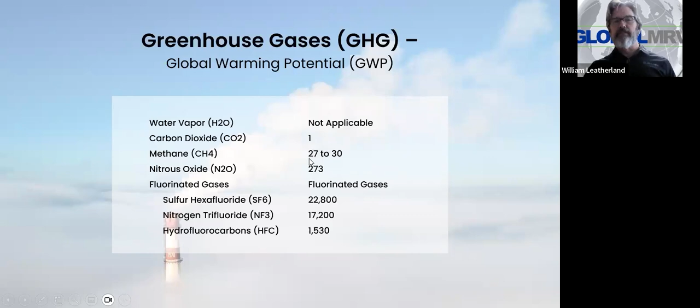This gives the balance, and actually it's hard to see nitrous oxide. It's so small, it looks like, okay, why do we pay attention to it? For all the greenhouse gases, here are the sulfur hexafluoride, nitrogen trifluoride. These have an even higher global warming potential. Let's take a look at those really quick, and also the greenhouse gas percentages in the actual atmosphere. You see 4% for water vapor, carbon dioxide, methane. It shows nitrous oxide as such a small percentage. So why do we find it important?

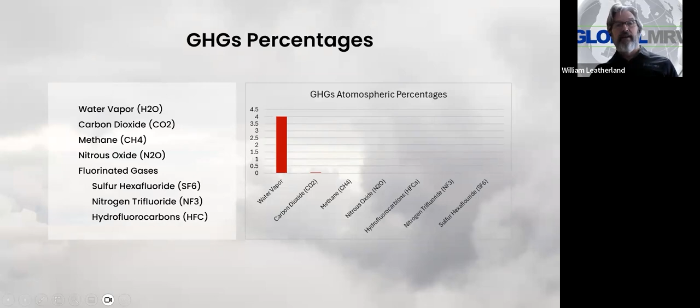A water molecule exists in the atmosphere for maybe 2 weeks, falls back into the whole condensation, evaporation cycle. Carbon dioxide stays in the air not quite as long as nitrous oxide, but there's much more of it. So that's why it has a much greater influence, which is why we base everything off of it. It's the standard, if you will.

Just want to make sure that everything's still working. I'm looking back at the loud and clear. Excellent. Glad to hear it. Loud and clear. Perfect. All right. So I'll go back to it.

You'll see that the carbon dioxide, there's more of it in the atmosphere, but it doesn't last as long. Whereas nitrous oxide, there's less of it in the atmosphere, but it lasts much longer, and it's got a higher global warming potential. You see everything compared with methane, hydrofluorocarbons, nitrogen trifluoride, all the different ones that we have. Like I said, I'm just going to go through this really quick. You could see this whole thing on last month's webinar if you'd like to take a look at it.

So we were talking specifically about global warming potential and how nitrous oxide affects global warming, how nitrous oxide is part of vehicles, automotive. But one thing I'd like to take a look at really quick. I actually enjoy this. I don't know if you guys have ever seen Top Gear or not, but nitrous oxide, N2O, is actually utilized in so many different ways. It actually can be a useful gas.

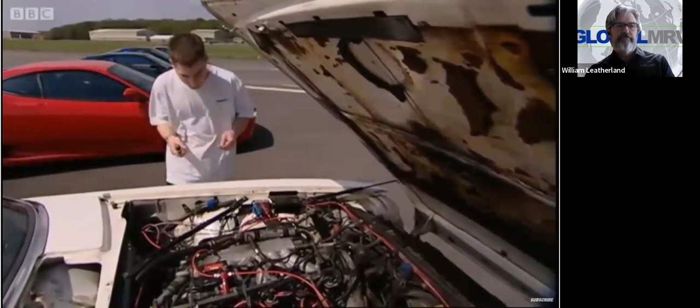Jaguar XJS was battered by the might of the world supercars in a straight line fight on our test track. But we're not going to leave it at that and give up. We're going to go back for another go. But this time, the Jag has got a little trick up its trousers. Oh, why that? So the Top Gear Warhorse is going to take on the best the world has to offer. How, you might ask, are we going to do that? Well, we're going to cheat, obviously. And we're going to do it with the help of the wizards of NOS. NOS is nitrous oxide system. That's this stuff. And the guys who fitted it are the wizards.

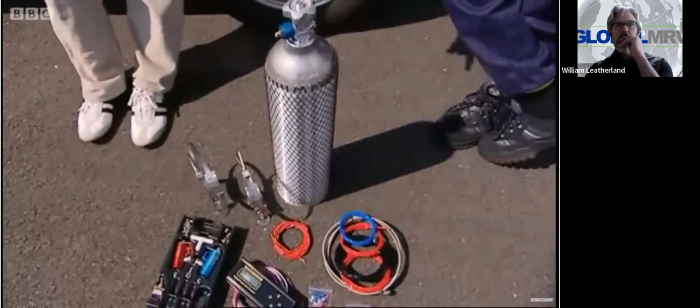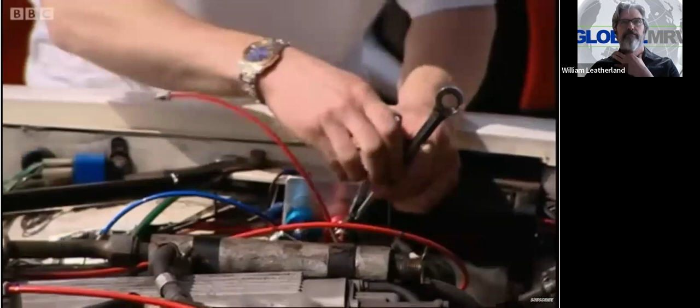Trevor, you put all this in our car. How much difference is this going to make? Well, the system's got the ability to deliver up to 500 horsepower extra. 500 horsepower over and above. Just very, very simply, how does it work? We feed oxygen in the form of nitrous oxide into the engine. We'll mix that with an extra supply of fuel. The combination of the two burns in the engine and produces more power. What if you get it in the wrong percentage? If we put too much fuel in, it'll just belch out black smoke out the exhaust and it'll reduce power. If we put too much nitrous in, it could melt something. What, like the engine? Like the engine, yeah. So you're probably going to break our car.

And there they are. £500,000 worth of supercars nearly against 250 quid worth of rusty Jag, albeit with a few hundred quid worth of nitrous added on. I just hope it makes it to the start line. So for this run, the nitrous will give our old Jag an extra 200 horsepower, making a total of 500. But will that be enough? And will it hold together? Oh yes, and straight away you can see the difference. It's blowing away the Venturi, the Corvette, the Honda, and even the Ferrari 360. But the big question is, can it hold off that mighty Porsche 911 Turbo?

Well, right for the old Warhorse, yeah, it just goes to show 250 quid worth of Jag, about 500 quid worth of nitrous, and it'll do a standing quarter in 13 seconds. And that's faster, as we've just shown, than a Porsche 911 Turbo and a Ferrari 360.

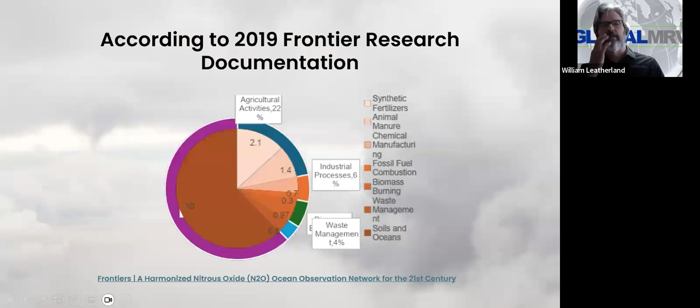And here, this is a group called Frontiers, and they produce scientific journals and scientific papers. They're about the third largest supplier of scientific papers in the world. So they give a much different number here. But once again, you can see the small part that we're looking at, fossil fuel combustion, is about 0.3 of this whole pie. It's not quite a percentage. It's a little bit different here, but it's still a very small percentage, as you can see.

So when we're looking through all this, the main contributors, I wanted to make sure that we break them down quickly. I'm going to go through them kind of fast so that it'll be easy for you to understand, even if you're not a chemistry person, like I'm not a chemistry person, because you'll see the information kind of repeats itself for agricultural, biomass, natural resources, and even waste management. So one of the main contributors, agriculture, and we're looking at the synthetic fertilizers.

The use of nitrogen-based fertilizers in agriculture is one of the largest sources of N2O emissions. I say one of the largest because I initially read through the EPA documentation, then saw the Frontiers documentation, so it's one of the larger sources depending on which documents you're looking at.

This all comes down to microbial processes happening in the actual fertilizer. Nitrogen, as we may remember from chemistry class, is one of the most abundant elements and is needed for plants to survive. So synthetic fertilizers are applied to the soil to increase the nitrogen content.

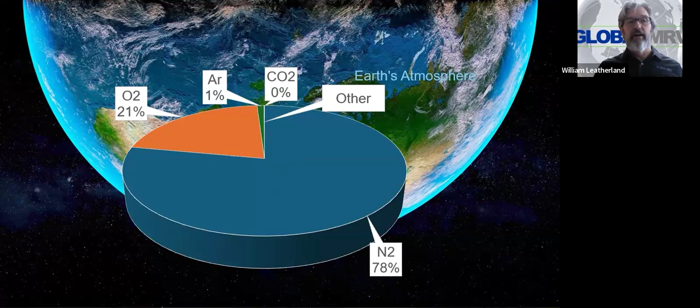Here you can see nitrogen - this is the balance of the Earth's atmosphere: 78% nitrogen, 21% oxygen. This is what we think about the most, what we're breathing, but we're breathing nitrogen as well, it's coming through us. Carbon dioxide, argon, you see the other breakdowns of it. Nitrogen is a huge part of our lives, a huge part of what we have.

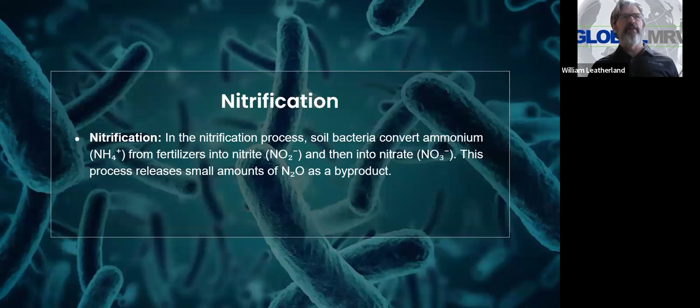When we go through these synthetic fertilizers and look at nitrification and denitrification, there's a whole chemical process for how that's done. Ammonium from fertilizers is converted to nitrite, NO2, and nitrate, NO3, and during that process we release N2O. Denitrification is a little bit different.

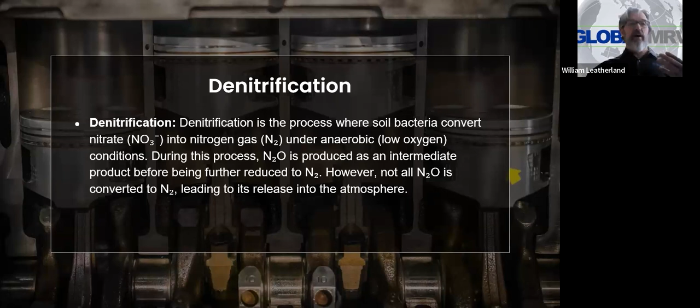Denitrification is the process where soil bacteria convert nitrate, NO3, into nitrogen gas under anaerobic - low oxygen - conditions. During that process, N2O is produced as an intermediate product. It's not something they're actually trying to make, it's just off-gassing, adding to the atmosphere. That's in the chemical processing of making fertilizer.

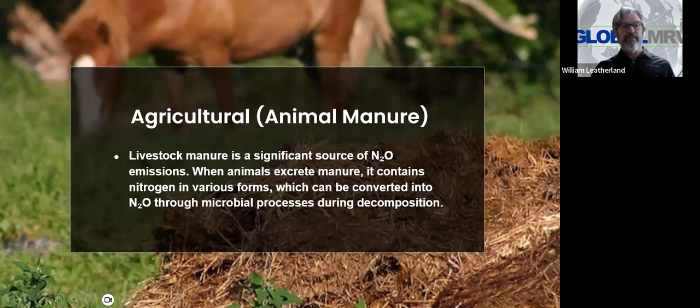As we move to agriculture, animal manure is another significant source of N2O production, actually producing it itself. Once again it has a lot to do with nitrification and denitrification, the microbial processes. When we break down livestock, 70% of that comes from manure from cattle. Kind of disgusting that we're talking about this. Why aren't we talking about cars?

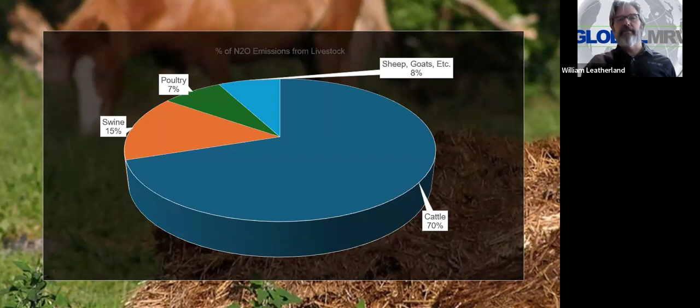We're going to get to it. Why aren't we talking about vehicles and the combustion industry? We're going to get to it. But I thought this was interesting.

There are different manure management practices that can be taken to reduce this: anaerobic digestion, frequent manure removal - there are so many different ways.

A lot of this is being impacted by large industrial farming and industrial cattle raising compared to the past, when people had their cattle out in pastures. Now when they contain them in buildings, it promotes microbial activity and promotes a low-oxygen environment since everything's inside the building, covered, not a lot of sun. So you have more of it being produced now than in the past.

Once again, you won't see that in your regular, smaller farmers - it's more the industrial complex type of farmers. And it can make a difference: soil conditions, temperature, and moisture levels. This is another thing you'll see repeat itself over and over.

Even when we go to biomass burning - here's another section - you have the combustion of organic matter. I was curious about this because it's prevalent and we saw it recently with the LA fires. What happened with the LA fires and how did that affect us?

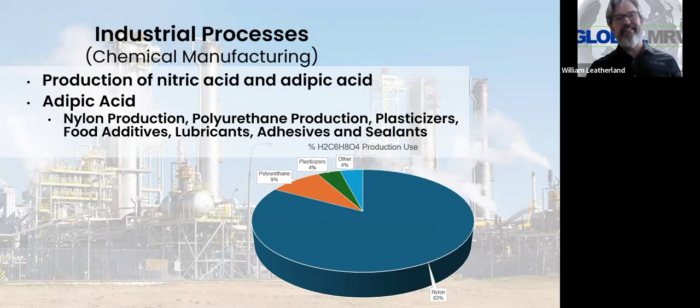Now, also we have adipic acid. This is interesting to look at. It's in nylon production, polyurethane production, plasticizers, and that's right, adipic acid in your food additives. I'm not sure if that's the creation of food additives or actually what's put into our food, but it's still something to know that the same thing they're making nylon or lubricants with, they're also making your food additives with.

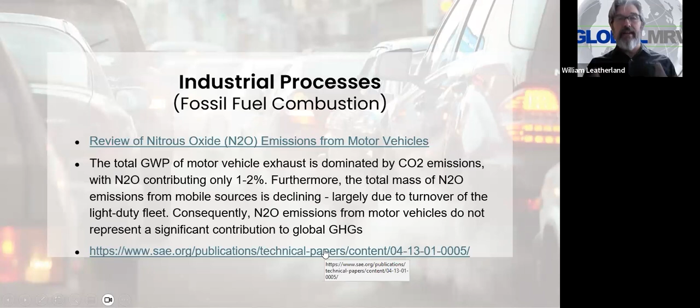Furthermore, the total mass of N2O emissions from mobile sources is declining. We're improving as we develop different catalysts and catalytic converters, get more efficient with our engines, and turn over that light duty fleet—old vehicles are turning into new vehicles. So N2O emissions from motor vehicles don't represent a significant contribution to global GHGs. I get that from our reference paper, SAE, and you'd think they'd want to favor saying it doesn't contribute, but I think even with the 1 or 2%, that's actually a high estimate.

So there are different ways N2O is produced. One is high temperature combustion. There's thermal decomposition of nitrogen compounds—at high temperatures, the nitrogen containing compounds in the fuel can decompose and react with oxygen to form N2O. Or it could be incomplete combustion, something racers and truckers talk about often. If they're having incomplete combustion, they see not only their fuel efficiency go down, but it also creates a higher opportunity for N2O to be created.

Fuel composition makes a huge difference—it's a matter of how things are composed and heated, and the oxidation of nitrogen in the air. The nitrogen present in combustion can react with oxygen at higher temperatures. We're talking about how temperatures have to be put into a specific box of what can be utilized, and we'll talk about that in just a second.

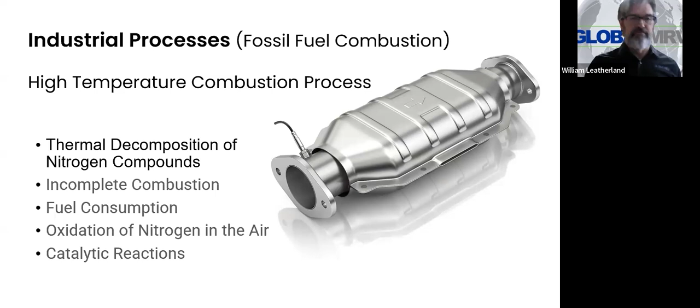And then catalytic reactions—with some combustion systems, catalysts are used to reduce emissions, and catalytic converters are constantly used to reduce emissions. We'll talk about how the oxygen sensor makes a difference in that. So NOx reduction by catalytic converters—N2O can be produced through ammonia slip, which is probably one of the main things we need to measure these days, because N2O is very difficult to measure in real driving emissions. So we measure ammonia instead, because that's what reacts with oxygen to create N2O.

The catalyst composition and temperature makes a difference—again, we're talking about composition, incomplete reduction reactions, secondary reactions. Now, as we continue, let's talk about catalytic converters and why they were made. These things were created back in the 1950s and continue to be improved today, but they weren't even required in vehicles until the 1970s, and not in Europe until the Euro 1 emission standards on January 1st, 1993.

But they make a huge difference, because when you use those catalysts, you take things like nitrogen oxides, carbon monoxide, and hydrocarbons, and transform the NOx into nitrogen, the most abundant thing, and the carbon monoxide into carbon dioxide. It seems counterintuitive, but we'd much rather have carbon dioxide in the atmosphere than carbon monoxide. It also takes hydrocarbons, separates the carbon out to go into carbon dioxide, and ultimately produces water with the leftover hydrogen.

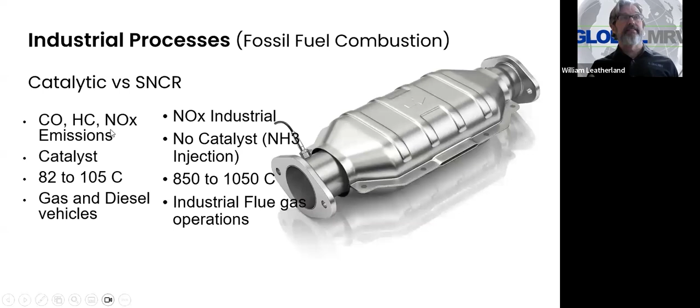A huge difference is the temperature of your emissions as you're coming out of a vehicle, 82 to 105 degrees Celsius if you've got a gasoline engine or possibly a diesel engine, as opposed to flue gases, 850 to 1050 degrees Celsius, as I'd already talked about. These are gas and diesel engines, and this is mostly industrial flue gas operations. So this is the catalyst over here, and this is SNCR.

The next way that we try to reduce emissions, but it can produce N2O, is through selective catalytic reduction, SCRs. Most of that is talked about in industrial processes, and that's where it's usually used, but it's also used on large diesel engines and on many 18-wheelers.

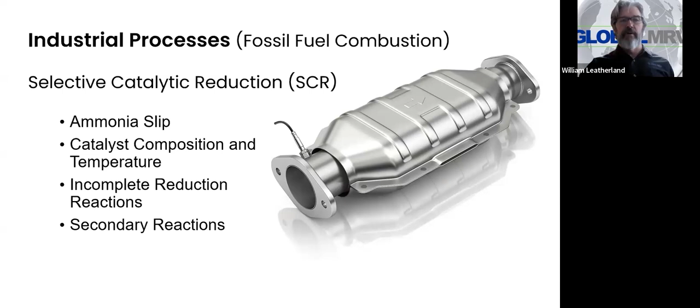This is where you reduce nitrogen oxide emissions by injecting urea. Then it goes through a catalyst where the reaction is more potent, and it facilitates the chemical reaction to convert NOx into nitrogen and water. Once again, that's what we're trying to do: take that NOx and convert it into nitrogen and water. And you might be familiar with this with DEF, diesel exhaust fluid.

So what are the differences between all of them, just real quickly? We already compared these two. With SCRs, for NOx in industrial and diesel, it's got a catalyst and a reductant, it's varied in its temperature, and it can be used in industrial and diesel engines. These both go after NOx, whereas usually the catalytic converter is trying to eliminate CO, hydrocarbons, and NOx.

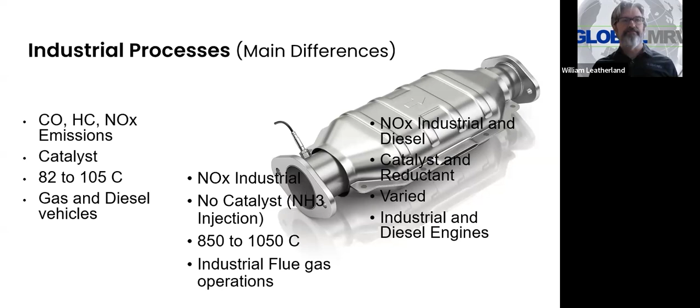This gives you an overall visualization. I wrote here that it's an internal combustion engine vehicle, but this is all internal combustion engine and flue gas being produced. I think most of the time people think of those just being in automobiles. But this is everything that's produced in typical emissions, which is why you see 83% of it is CO2, which is what makes it so important.

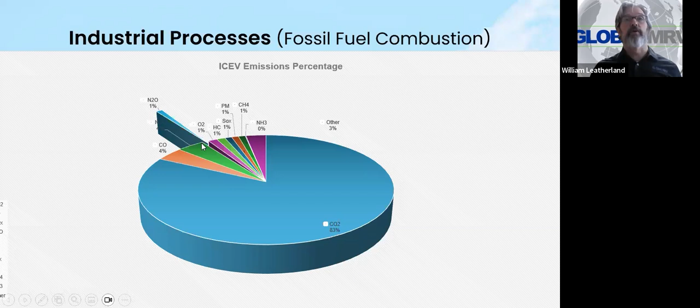Now, when it comes to N2O, I'll go to the next slide so you can see. N2O is just a small sliver. Everything I'm reading, it's a little less than 1%. This is what we're trying to eliminate and bring down in vehicles. And it can be hard to measure. It's a very difficult thing to measure in this smaller capacity, when you've only got 1%.

And to get it in a true mobile sense, it's more difficult to do. That's why we talk about measuring NH3, because that's one of the main things that reacts. And you'll see that most in diesel engines, not so much in gasoline engines. But as temperatures change, as they make changes to engines, you'll see that more and more.

And in fact, it was just yesterday I was looking at how Toyota has created an internal combustion engine that burns solely ammonia. Of course, there's a whole lot of challenges in that, but it's interesting that we're continuing to use the internal combustion engine to try to propel ourselves into the future.

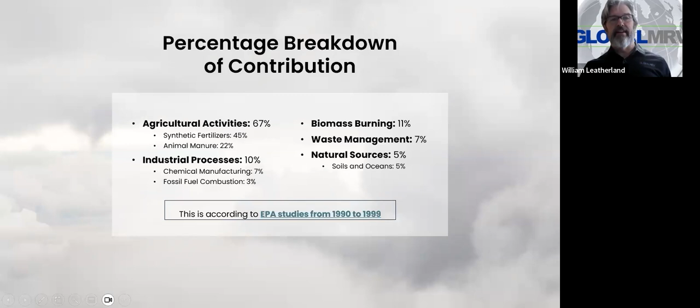This right here is the original breakdown. You saw that in the graphs that I showed before. I won't belabor those right now. And the difference, of course, between these two, you see the difference in the numbers. 5% for natural sources, and that was from an EPA study from 1990 to 99, which is the same study I talked about at the beginning.

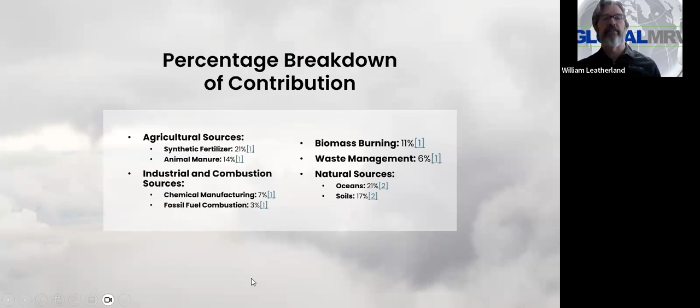And then with these, you can see it comes from Our World in Data, and also it comes from Frontiers and EPA. So this is all the information added together. And you can see that natural sources are a little bit higher here. If you have any questions about where I got this information, I'd be happy to share it with you. We can go into teragrams of how much N2O was created.

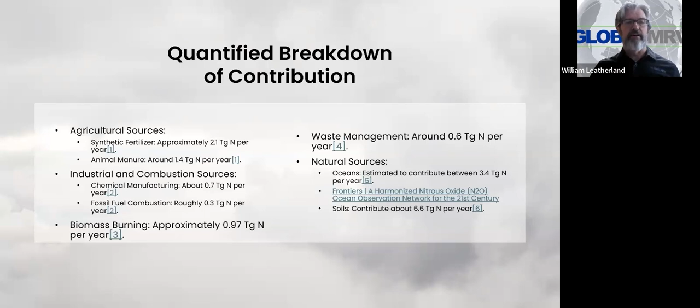I appreciate you guys taking the time. I want to open it up to questions now. If you have any questions, I'd love to hear them. All right. Well, that's a good question.

But to your point, what would be more accurate? Well, the most accurate ones are infrared spectroscopy and photoacoustic spectroscopy, because those are more direct measurements. With infrared spectroscopy, there's actually a direct measurement in the absorption of the infrared light by the N2O molecule. So if it sees it, it absorbs it, and gives you a direct measurement of it.

Photoacoustic is similar, but this is sound waves. It absorbs the light and undergoes some kind of thermal expansion that creates some kind of acoustic sound, a vibration that's measured. I don't completely understand how it's done. I know we've seen them before, we've worked with them before, but I'm not real well versed in that. Does that answer your question?

I was prepared for that question right there. So once again, I kind of harken back to the things that we're talking about here in Buffalo right now. And hopefully I've got another video that'll actually work for it. You want to know about cross sensitivity and why it makes a difference. Just 1 second. Let me see if I can get this. I'm going to stop this for a second.

So cross sensitivity, I've got a great example for cross sensitivity here. Let me make this here. All right. For those of you who like football, here you go. I'm going to talk about cross sensitivity. So hopefully you'll be able to hear this. Hopefully it'll work just as well.